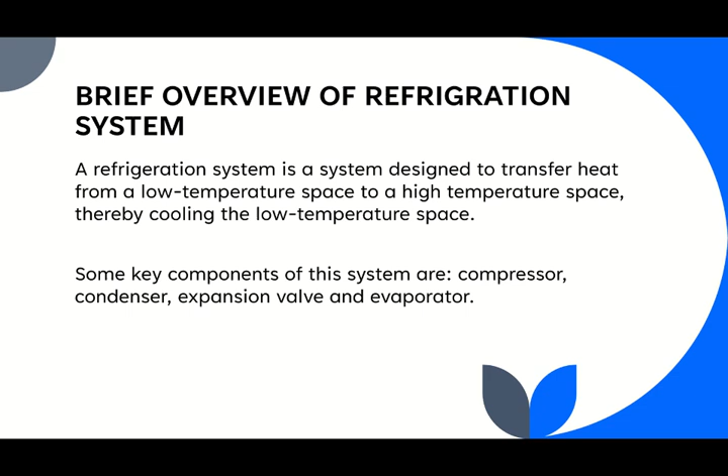Let's delve more into the key components of the refrigeration system. We have the compressor, which compresses the refrigerant gas, increasing its temperature and pressure. The condenser dissipates heat from the refrigerant to the outside environment, causing it to condense into liquid.

The expansion valve reduces the pressure of the refrigerant, allowing it to cool and expand. The evaporator absorbs heat from the refrigerated space, causing the refrigerant to evaporate back into a gas. Note: a refrigerant is a substance, typically a fluid, used in refrigeration systems to absorb heat from one area and release it into another.

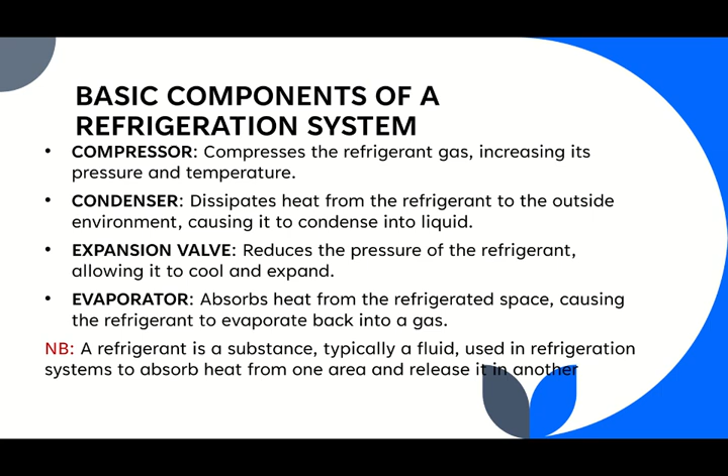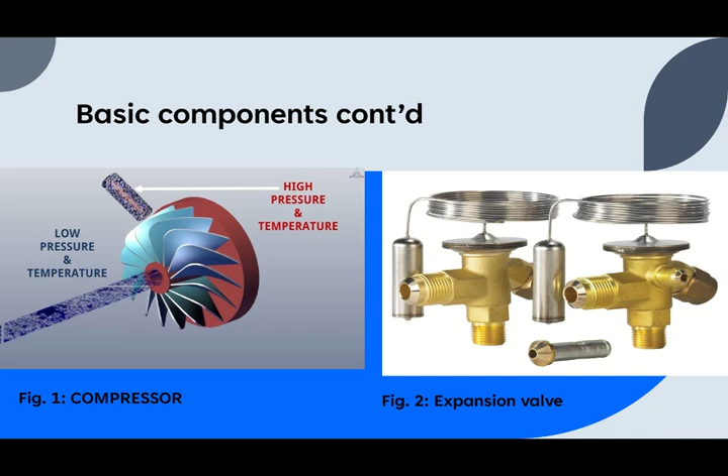The refrigeration cycle operates continuously, involving the transformation of the refrigerant through different states, from gas to liquid and vice versa. The cycle begins with the compressor drawing in low pressure refrigerant gas, which it compresses into a high pressure gas with a high temperature. This gas then travels to the condenser, where it releases heat and condenses into a liquid.

The liquid refrigerant then passes through the expansion valve, where its pressure drops, cooling it down. Finally, the cooled liquid refrigerant enters the evaporator, absorbing heat from the refrigeration chamber, vaporizes and returns to the compressor. It is a continuous cycle.

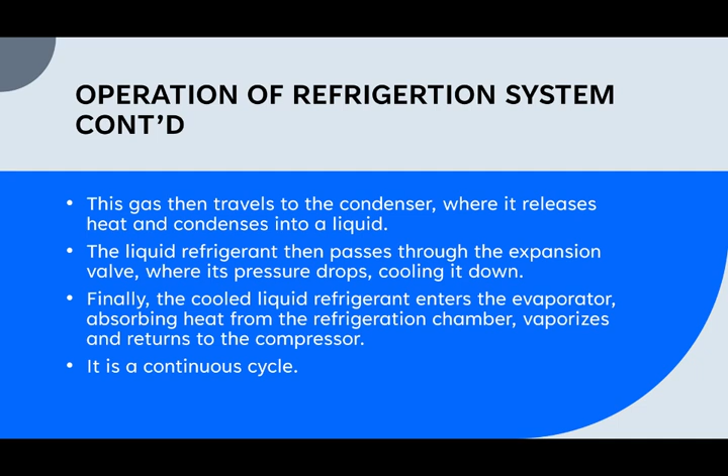The compressor draws in the low pressure refrigerant gas and compresses it into a high pressure refrigerant gas of high temperature. This refrigerant gas is then condensed into a liquid refrigerant at the condenser, after which it undergoes expansion at the expansion valve for cooling to take place.

The cooled refrigerant moves into the evaporator, where heat exchange occurs, hence taking out the heat from the refrigeration area, that is, the low temperature space. The heat vaporizes the refrigerant, and it returns to the compressor for the cycle to continue.

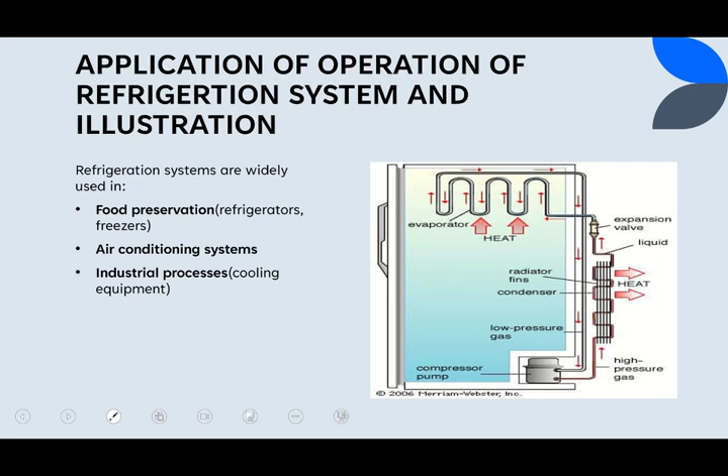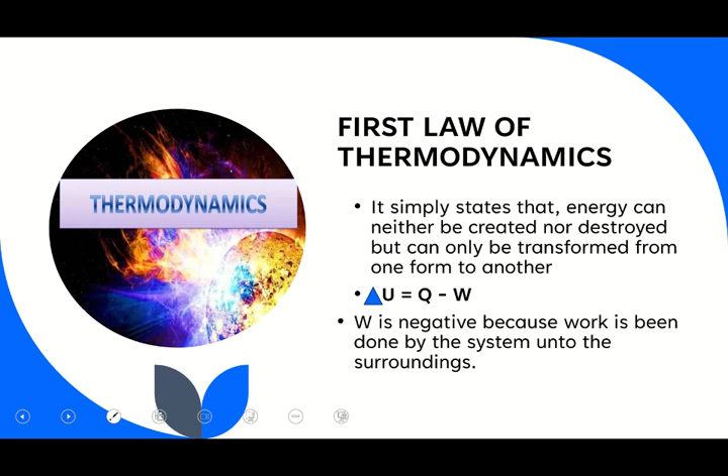Let's get into the second part of this lesson, where we get to know the first law and how it applies in the refrigeration system operation. The first law of thermodynamics simply states that energy can neither be created nor destroyed, but can only be transformed from one form to another. W is negative because work is being done by the system onto the surroundings.

Application of the first law of thermodynamics in refrigeration. In the refrigeration cycle, the total energy input equals the total energy output. Also, the refrigeration system transfers heat from a low temperature area to a high temperature area whilst work is being done on the refrigerant. Component by component, the first law is also applied.

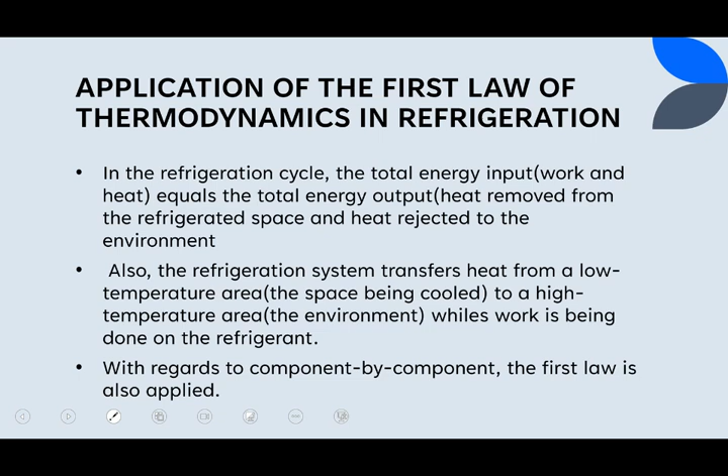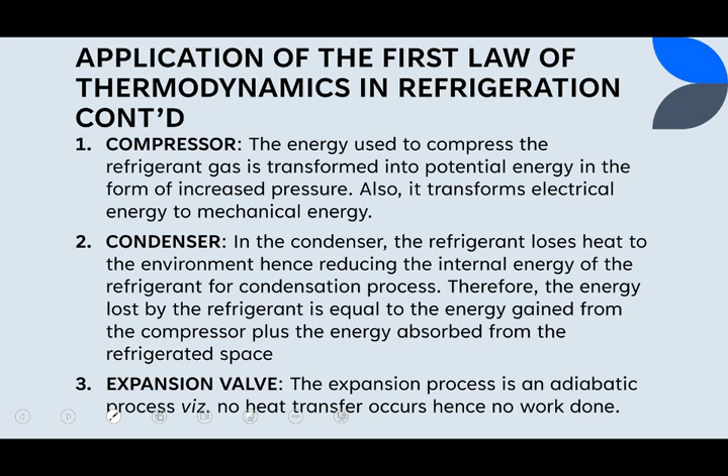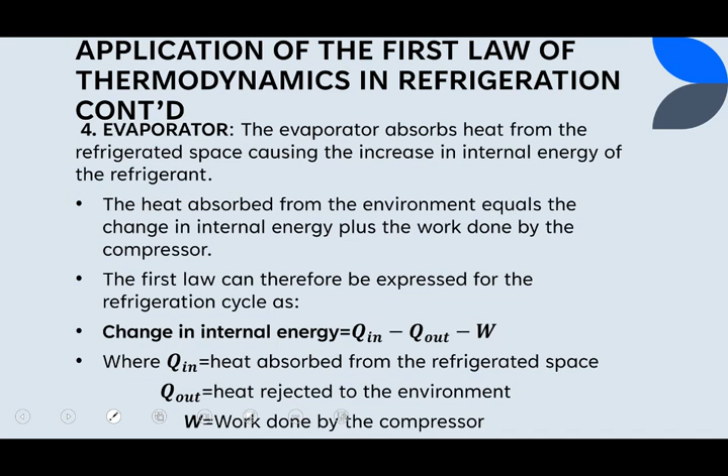In conclusion, this lesson has illustrated how the first law of thermodynamics dictates how energy is conserved and transformed within a refrigeration system. By understanding these concepts, engineers can design more efficient systems that effectively manage energy use with the goal of enhancing performance as well as operational costs.